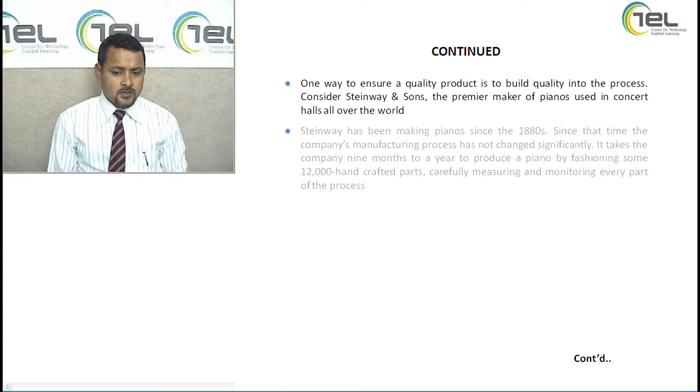One way to ensure a quality product is to build quality into the process. Consider Steinway and Sons, the premier maker of pianos all over the world. Steinway has been making pianos for the last 130 odd years. It started producing since 1880. Since that time, the company's manufacturing process has not changed significantly. It takes the company 9 months to a year to produce a piano by fashioning some 12,000 handcrafted parts, carefully measuring and monitoring every part of the process.

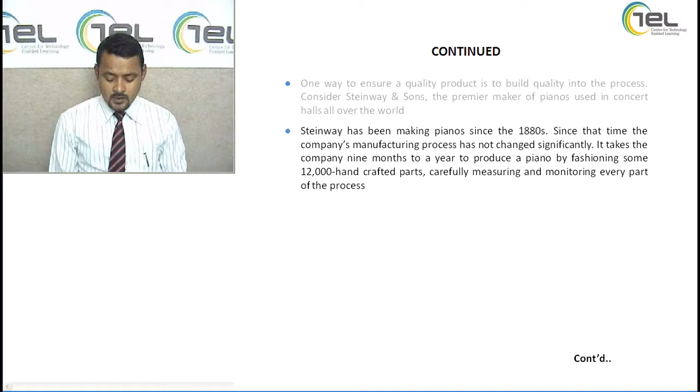While many of Steinway's competitors, competing piano producing companies, have moved to mass production, where pianos can be assembled in a flat 20 days, Steinway has maintained a strategy of quality defined by skill and craftsmanship. Steinway's production process is focused on meticulous process design and an extremely high degree of consistency. This has contributed to making it more synonymous with top quality.

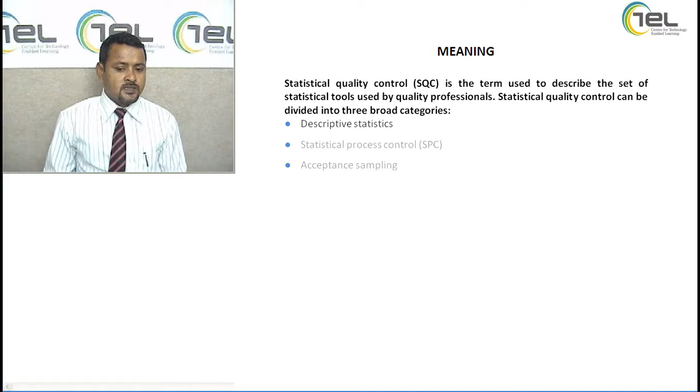Statistical quality control is a term used to describe the set of statistical tools used by quality professionals. Statistical quality control can be divided into three broad categories: descriptive statistics, statistical process control, and acceptance sampling. Descriptive statistics are used to describe quality characteristics and relationships. Included in it is statistics such as mean, standard deviation, range, variance, etc.

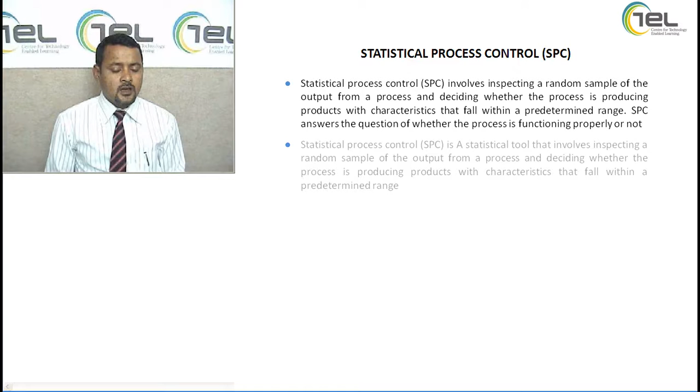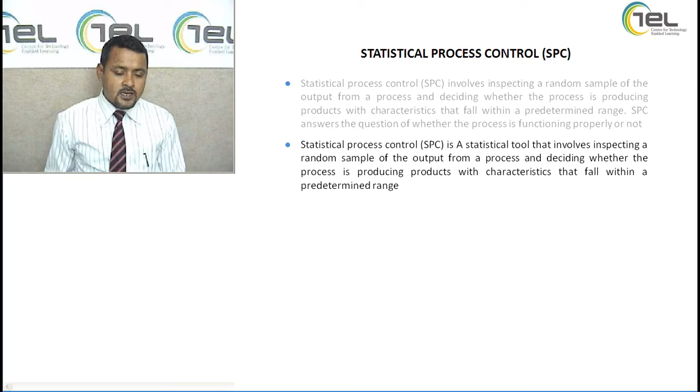Statistical process control, on the other hand, involves inspecting a random sample of the output from a process and deciding whether the process is producing products with characteristics that fall within a predetermined range. SPC answers the question of whether the process is functioning as per the design or not. So statistical process control can be defined as a tool that involves inspecting a random sample of the output from a process and deciding whether the process is producing products with characteristics that fall within a predetermined range. So statistical process control generally means inspecting the random sample and deciding if it conforms to the established quality control procedure. Quality control, on the other hand, has something to do with quality.

The third one, acceptance sampling, is the process of randomly inspecting a sample of goods and deciding on that basis whether to accept the entire lot based on the results. Acceptance sampling determines whether a batch of goods should be accepted or rejected. It can either be accepted entirely or rejected entirely.

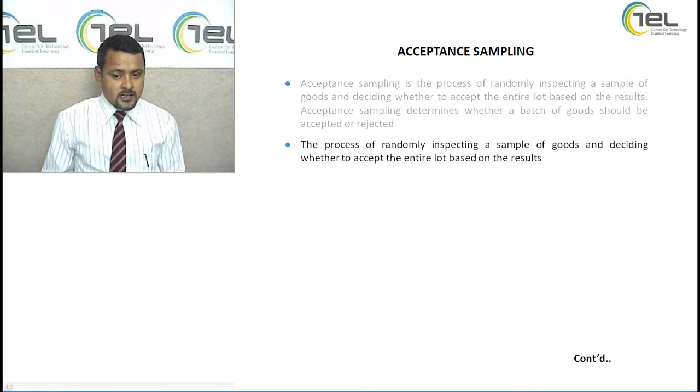All three of these statistical quality control categories are really helpful in measuring and evaluating the quality of products and services. However, statistical process control tools are used very frequently because they identify problems of quality during the stages of production. For that reason, we devote most of the discussion to this category of tools.

The quality control tools we will be learning do not only measure the value of a quality characteristic, they also help us identify change or variation that takes place. But first of all, we have to find out about measuring quality. Once we know the measuring quality, we will be able to identify specific tools which can be used for measuring the variation in the production and the units of production, in fact.

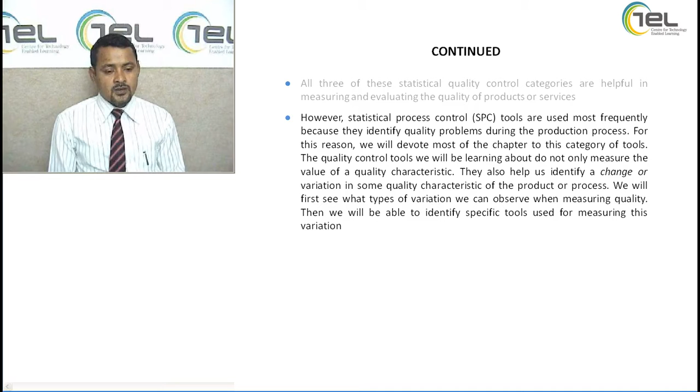Variation in the production process leads to quality defects and lack of consistency in the products.

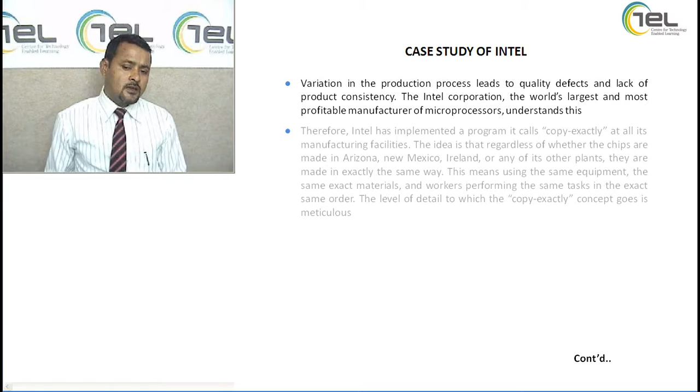We'll take the example of Intel Corporation, the world's largest and most profitable manufacturer of microprocessors. Intel understands the quality defect and product consistency.

Therefore, Intel has implemented a program it calls Copy Exactly. This Copy Exactly program has been installed in all of its manufacturing facilities. The idea is that regardless of whether the chips are made in Arizona, New Mexico, Ireland, or any of the other plants, they are made exactly the same manner.

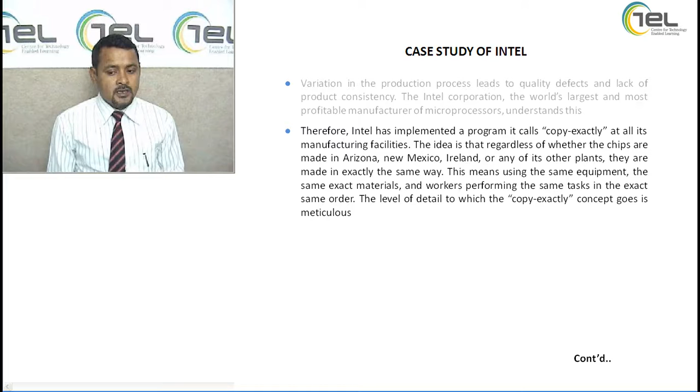This means products are manufactured at any of these facilities using the same equipment, the same exact material, and the same tasks being performed in the same order. The level of detail to which the Copy Exactly concept goes is meticulously planned.

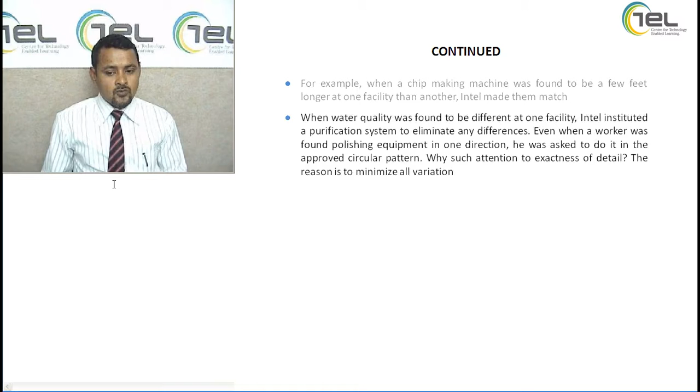For example, a chip making machine was found to be a few feet longer at one facility than another. Intel made them match. When the quality of water at one plant facility was found to be different, Intel instituted a purification system to eliminate any kind of difference.

Even when a worker was found polishing equipment in one direction, he was asked to do it in the approved circular pattern.

But why such attention to exactness of every detail? The reason is to minimize all the variation that can be found, and as the variation goes on, the variability will increase and there will be product variances.

That's why you will find that all the chips made by Intel conform to the same standard. Zero variance products produced by Intel.

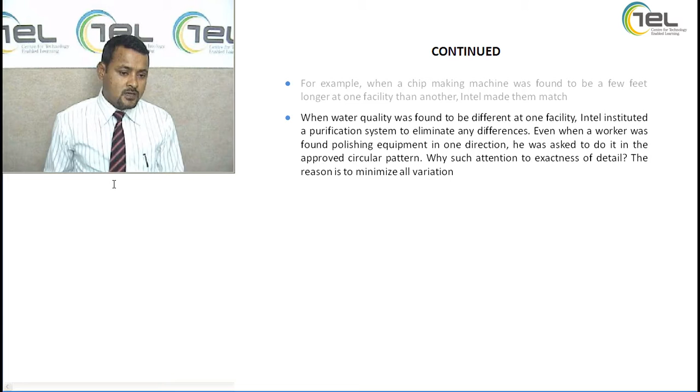If you look at bottles of a soft drink at a grocery store, you will notice that no two bottles are filled exactly to the same level. Some are filled slightly higher and some lower.

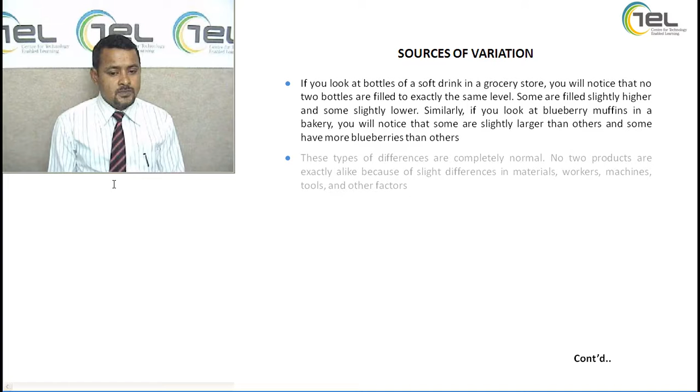Similarly, if you look at blueberry muffins in a bakery, you'll notice that some muffins are slightly larger and fatter, and some have more blueberries in them, some less. These types of differences are completely normal.

No two products in fact are exactly alike, because of slight differences in material, workers, machines, tools and other factors.

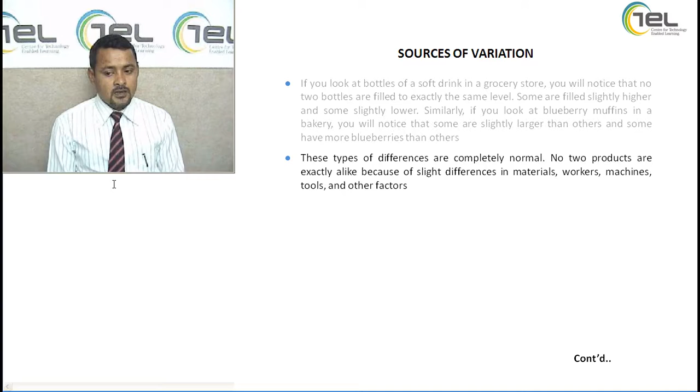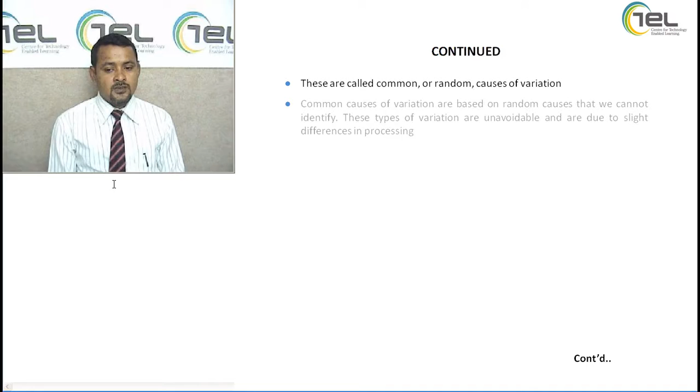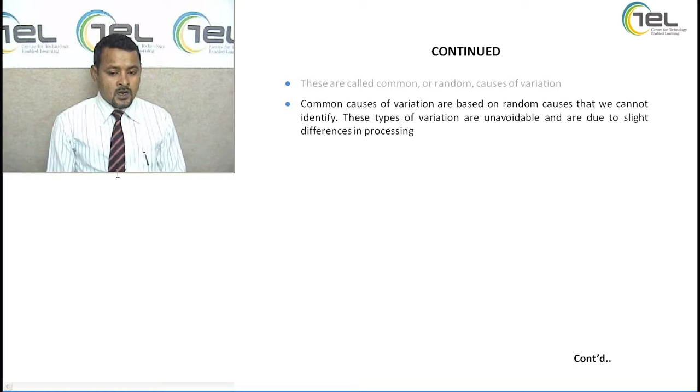These are called common or random causes of variation. Common causes of variation are based on random causes that we cannot identify. These types of variation are non-avoidable and due to slight differences in processing. Because it involves purely human nature of skill, it cannot be avoided under normal and natural conditions of production.

The second type of variation that can be observed involves variation where the causes can be precisely identified and eliminated. These are called assignable causes. The first one was common causes. The assignable causes of variation are the second type.

For example, you are using two different qualities of raw material in producing products. An employee who needs more training, or a machine in need of repair. In each of these examples, the problem can be identified and corrected. Also, if the problem is allowed to persist, it will continue to create problems in the quality of the product.

If the same work is done in two different manners, then there is bound to be quality differences in them.

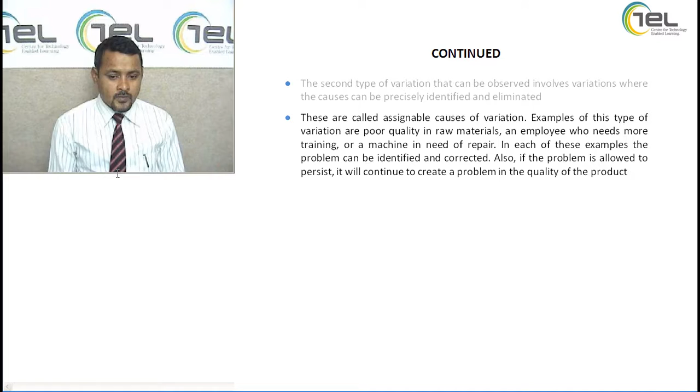So one of the causes is common causes of variation, which cannot be avoided, but random causes that cannot be identified because of things involved which are not alike. But assignable causes of variation are causes that can be identified and eliminated. If they are not eliminated, then the products will be different. There will be more variation in two products of similar nature taken from the same set of samples.

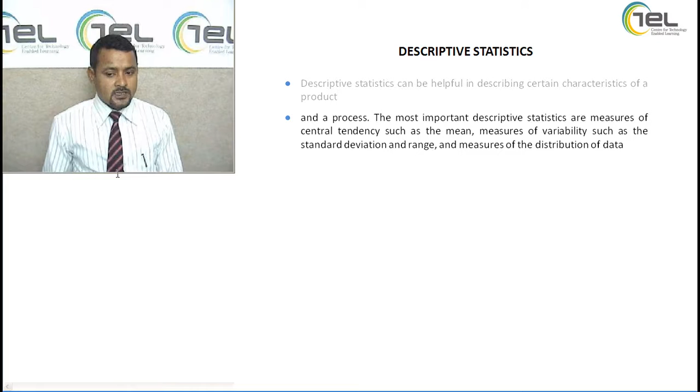So descriptive statistics is all about quantitative data. The statistics which are used are known as mean, range, and standard deviation.

Basically, we are going to discuss the statistical process control methods. Using statistical process control, we want to determine the amount of variation that is normal or common. Once you find the normal cause, then we monitor the production process to make sure production stays within this normal range. That is, we want to make sure the process is in a state of control.

The most commonly used tool for monitoring the production process is a control chart.

Different types of control charts are used to monitor different aspects of the production process. In this section, we will learn how to develop and use control charts.

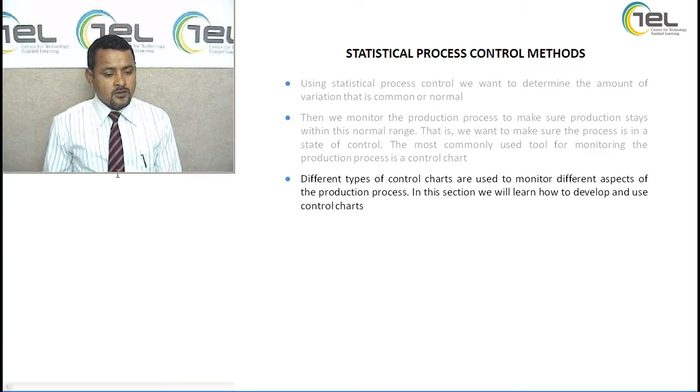A control chart, also called a process chart, is a graph that shows whether the sample data falls within the common or normal range of variation. A control chart will always have upper and lower control limits that separate common causes of variation from assignable causes of variation.

The common range of variation is defined by the control chart limits that remain within the upper and lower control limits. So the process is out of control when a plot of data reveals that one or more samples fall outside the control limits.

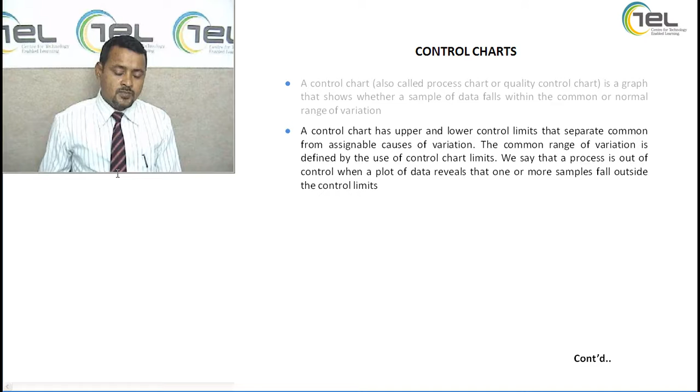An assignable cause can happen when one of the data points is beyond the upper and lower control lines. The upper control limit is the maximum acceptable variation from the mean of the process required to be in a state of full control. Similarly, the lower control limit is the minimum acceptable variation from the mean for a process that is in a state of control.

So we have a mean control limit, an upper control limit, and a lower control limit. Batches of production, goods which are randomly taken, should fall within the upper control limit and the lower control limit.

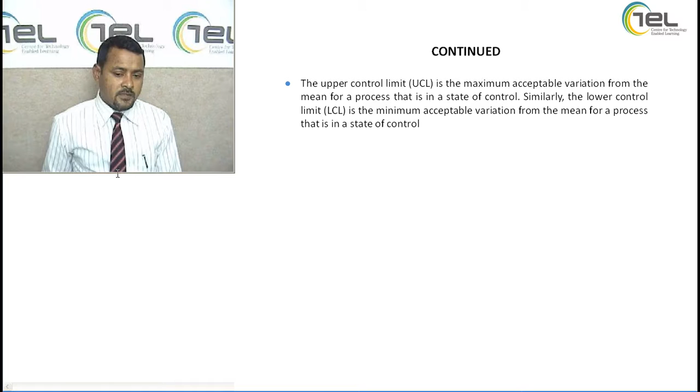The upper control limit and lower control limit describe that if something falls within these higher and lower limits, then it happens because of normal and natural causes.

But if something lies outside these upper and lower control limits, then the variation is out of control, and it is because of assignable causes — you can find a fault with the system, with the production centric system, with human error, everything.

So any point lying outside the upper control limit or outside the lower control limit is because of assignable causes.

Anything that lies within these two lines, including the central line, is actually happening because of normal, natural causes, which are completely acceptable, but nothing should go out of hand.

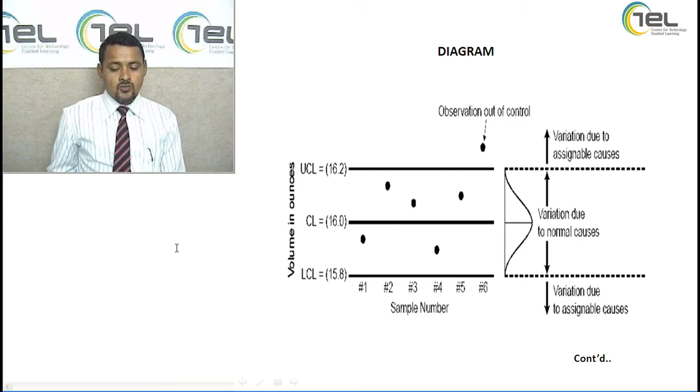Particularly, something falling beyond the upper control limit is said to be out of control, due to causes that can be controlled.

What is a variable? A variable is a product characteristic that can be measured and has a continuum of values, like height, weight, or volume. An attribute is a product characteristic that has a discrete value and can be counted.

Control charts for variables monitor characteristics that can be measured on a continuous scale, such as height, weight, volume, or width. When an item is inspected, the variable being monitored is measured and recorded in a particular manner. For example, if you are producing a certain kind of candle, the height might be an important variable.

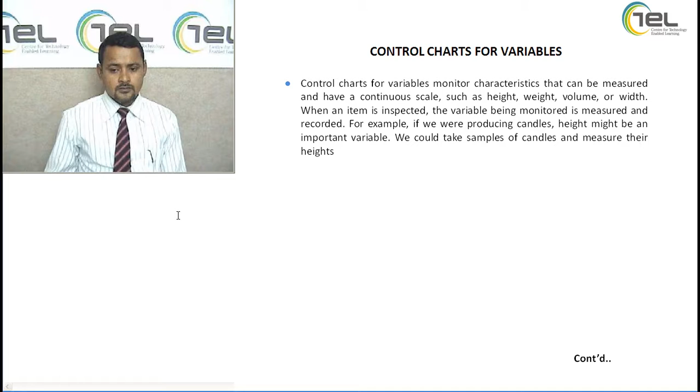We could take samples of candles and measure their heights. The most commonly used control charts for variables monitor both the central tendency, which is the mean, and the variability of data, which is either the standard deviation or range. Each chart monitors a different type of information.

When observed values go outside the control limits, the process is assumed not to be in control. Production is stopped and employees attempt to identify the cause of the problem and correct it.

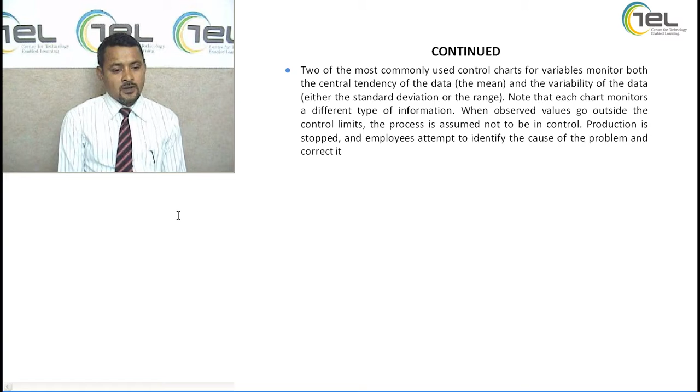We are coming to the first type of chart, the mean chart. A mean control chart is often referred to as an X-bar chart. It is used to monitor changes in the mean of a process.

To construct a mean chart, we first need to construct the central line of the chart. To do this, we take multiple samples and compute their means. Usually these samples are very small, with about 4 or 5 observations each. Each sample has its own mean, and the central line of the chart is then computed as the mean of all sample means.

X double bar is x1 plus x2 plus x3 plus the mean till the nth sample, divided by k, the number of samples. To construct the upper control limit, we use the formula: UCL is x double bar plus z into standard deviation of x bar. Lower control limit is x double bar minus z into standard deviation of mean, where x bar is the average of the sample means, z is the standard normal variable, and standard deviation of x bar is the standard deviation of the distribution of sample means, computed as standard deviation divided by under root n, where standard deviation is the population standard deviation and n is the sample size or total number of observations per sample.

For example, a quality control inspector at Cocoa Fizz Soft Drink Company has taken 25 samples with 4 observations each of the volume of bottles filled. The data and the computed means are shown in the table. If the standard deviation of the bottling operation is 0.14 ounce, use this information, given in the next slide, to develop control limits of 3 standard deviations for the bottling operation.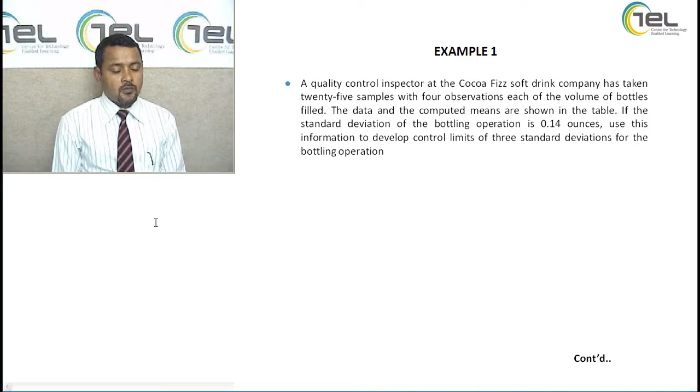So the mean is given, the numbers are given. There are 25 samples of 4 observations each, so altogether there are 100 samples.

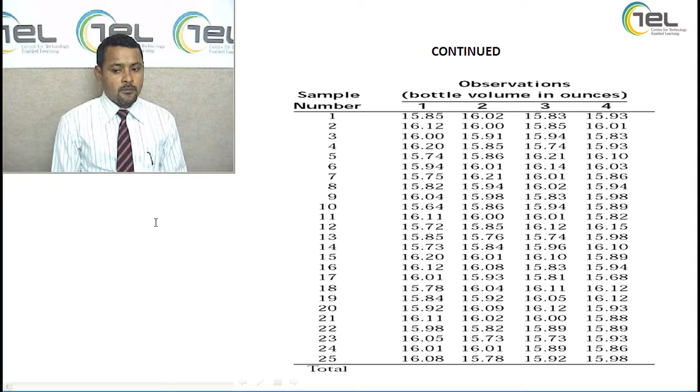What we do is take the same set of data given to us and calculate the mean of each sample. There are 4 samples each. For example, sample number 1 contains 4 bottles with values of 15.85 ounce, 16.02 ounce, 15.83 ounce, and 15.93 ounce. We add all 4 and divide by 4. The average of these 4 bottles comes to 15.91 ounce.

Similarly, for sample 2 and sample 3 we repeat the same procedure: we add all 4 variables, divide by 4, and get the mean average of that sample. So we get the total sample variation, and the sum total of the averages, the summation of x bar, is 398.75. Just ignore the range calculated alongside, because it will be used in the next example.

Now we calculate x double bar, which is 398.75 divided by the total number of samples, that is 25. So the double sample mean comes to 15.95, which means 15.95 is the sample mean of the entire set of population samples, that is 100 samples.

The upper control limit is x double bar plus z into standard deviation of x bar: 15.95, and we are given that z is 3, so 3 into 0.14 divided by under root 4. Standard deviation of x bar is calculated as standard deviation divided by under root n.

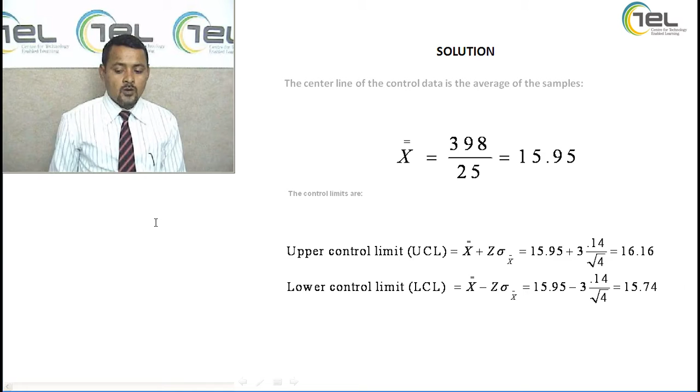So the mean control chart says that the process, the samples taken from the process, are fully controlled, and there is no question of any deviation happening out of control. So these activities lie exactly within the common cause of error, and there is no assignable cause because it is within the control of the process.

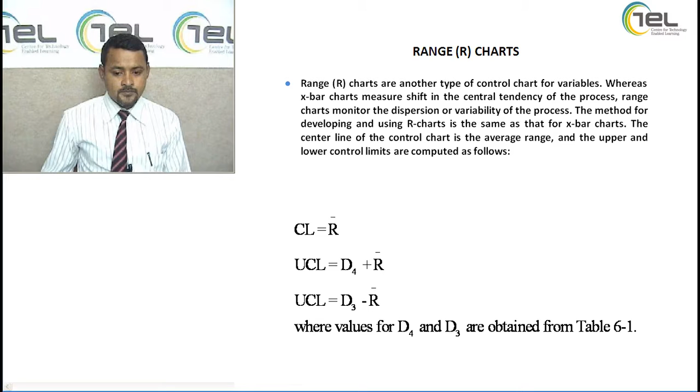The values of D3 and D4 can be obtained from the table given under the heading Table 6.1. The table is given for the range chart, for the sample size, and we can calculate D3 and D4 from it.

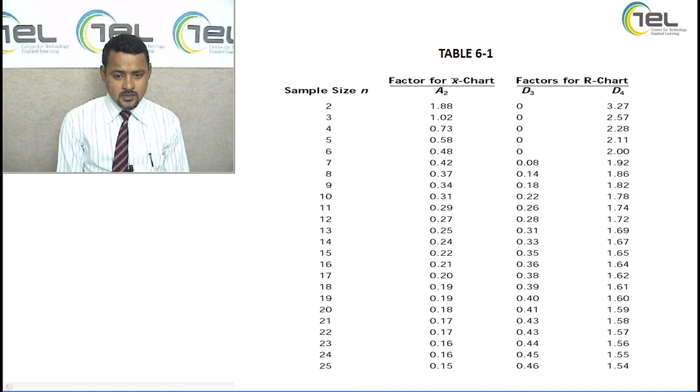You can see that for a sample size of 2 to 6, D3 doesn't have a value. D4 has positive values, higher for low sample sizes, and as the sample number goes up, the value comes down. But D3's values are smaller in the beginning, and as the sample size increases, the D3 value goes up.

We are taking the same example as earlier. The quality control inspector at Cocoa Fizz would like to develop a range chart in order to monitor the dispersion in the bottling process. We are using the same data set as the last question.

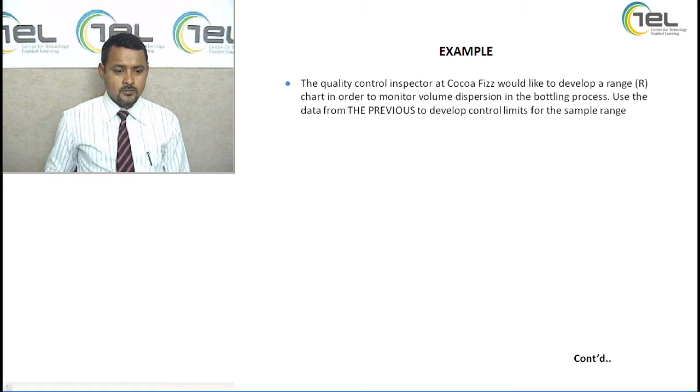The samples are given to us. There are 25 samples, each containing 4 bottles. The bottle volume in ounces is given.

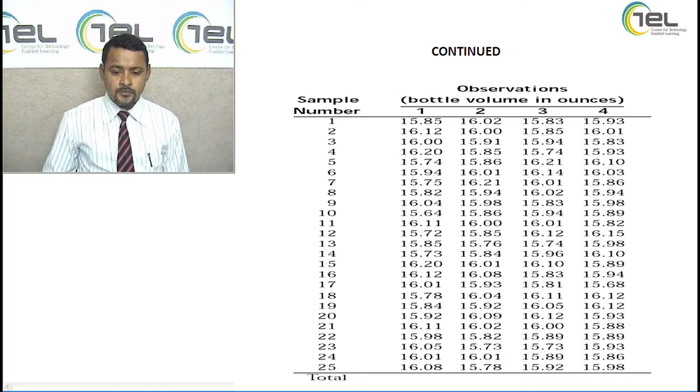Now we have to calculate the range. For sample number 1, there are 4 bottles, the highest being 16.02 and the lowest being 15.83, so by subtracting the lowest from the highest, we get a range of 0.19. For the second sample, the highest value is 16.12 and the lowest is 15.85, so subtracting 15.85 from 16.12 gives a range of 0.27.

We calculate the range for all the samples. By adding the ranges, we get a summation of 7.17.

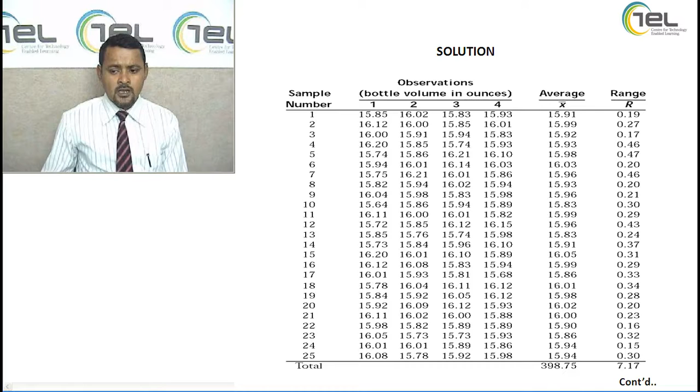From 7.17 we calculate R bar, which is the summation of range divided by 25, the sample size, giving 0.29. So the average range is 0.29. The number of bottles in a sample is 4.

From the table, for a sample size of 4, the value of D4 is 2.28 and the value of D3 is 0. Exact values have been taken for computational purposes.

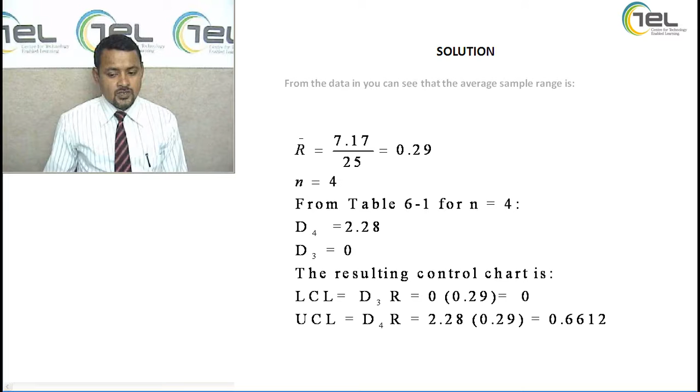So the resultant control chart: LCL is D3 multiplied by R bar, which is 0 into 0.29, equals 0, and the upper control limit is 2.28 into 0.29, which is 0.6612. So the lower control limit does not exist (is 0), the upper control limit is 0.66, and the control limit is 0.29.

We can see that none of the values lie below the LCL or above the UCL, which means that out of the 100 bottles taken across 25 samples, nothing has been out of control. So the entire process is within control.

Quality control is a system for verifying and maintaining a desired level of quality in a product or process through careful planning, proper equipment use, continued inspection, and corrective action as required. The objective of quality control is to develop a scheme of sampling a process and making a quality measurement that can be worked upon to minimize wastages.